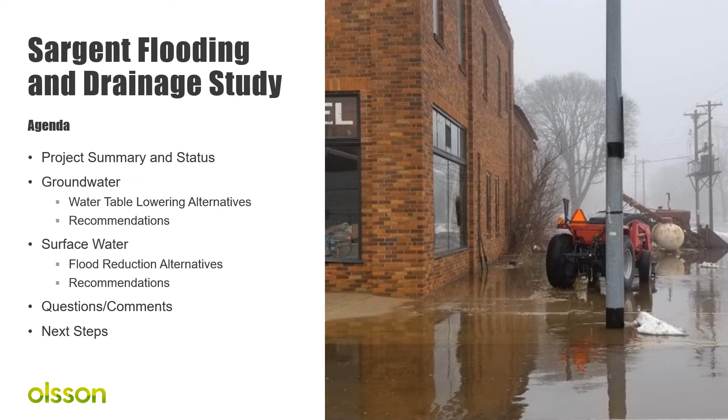At this point, the project has completed all of the hydrogeologic data and stormwater data evaluation. We've completed groundwater and surface water models to evaluate different alternatives and their effects on flooding and water table issues that, as I said, plague the city. We have had one public meeting, and we were glad to see the attendance at the meeting. We got a lot of information. Unfortunately, for this second public meeting, we're doing this online because of the COVID-19 directives across the state.

At this point, we've also provided in this presentation some conceptual project designs on some of the alternatives that we will be presenting in our final report. And so the final portion of this project is to prepare that report, and that will include the alternatives, the best alternatives for funding options for the different projects that we're proposing.

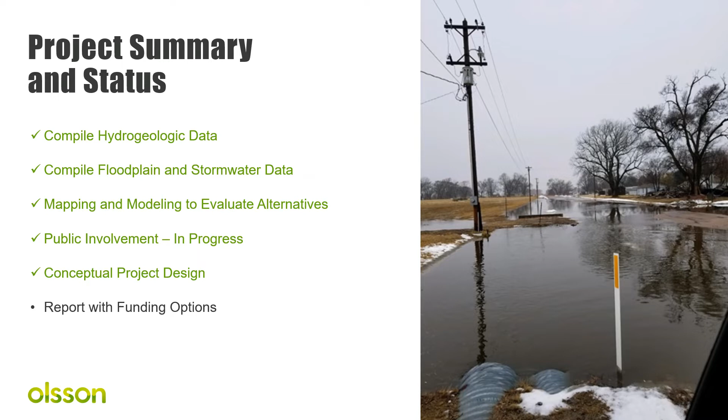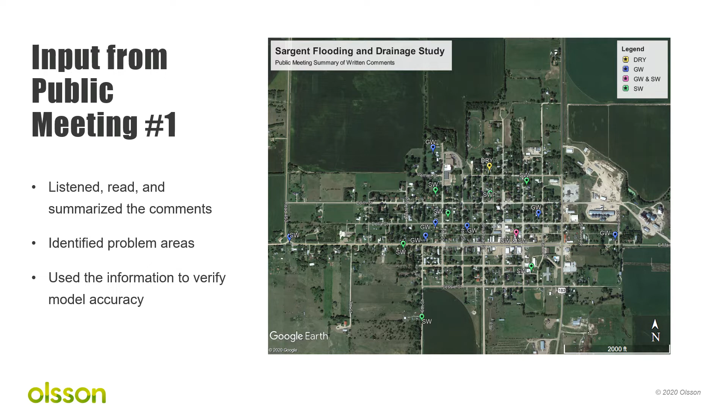Again, I just want to thank many of you for attending the public meeting we had. We took note and listened and read all of the comments that were submitted in writing, as well as many of the comments that we took down during the meeting itself. We identified the problems in the area in town. We also took note of that information and used it to verify the models that we developed for groundwater evaluations and surface water evaluations. So again, we really appreciate all the outreach that we've gotten from you all, providing that information. It really helped in detailing the information that we needed to do these analyses accurately.

So let's start with the groundwater evaluation. What we prepared for evaluating the ways to lower the water table elevation in town was a groundwater model that encompassed more than just the city. It did an area including the Middle Loup River and up into the uplands to the north. What we evaluated were two alternatives that we came up with to potentially lower the water table in town.

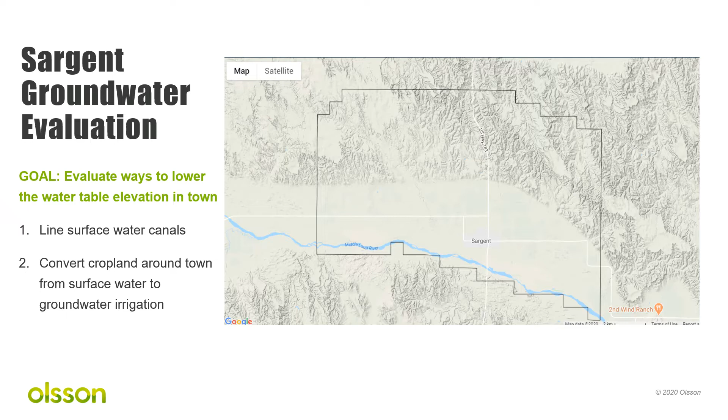One of them was to line the surface water canals that exist to the north, along the uplands here, right along the edge of town, as you know, on the north end of town. And then the other option was to convert cropland around town from surface water to groundwater irrigation. And I'll give you a little more detail on that right here.

The second evaluation that we did was to convert surface water irrigation north of town from surface water to groundwater by installing new groundwater wells. And to evaluate these two alternatives, we used a groundwater model we had developed.

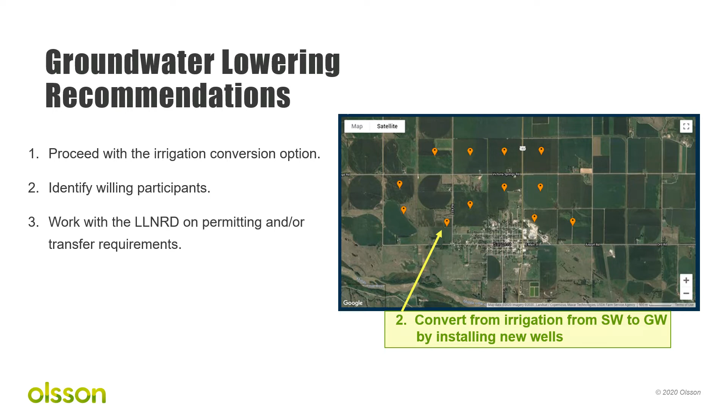Evaluation of the surface water drainage within the town of Sargent followed 3 basic steps. The first being identifying the drainages that contribute to flooding. We did that through feedback received at our first public meeting, data that we received through the NRD as well as the Sargent Irrigation District, and also topographic data from 2018 that allowed us to delineate the contributing drainage areas. And from that point, we could complete the hydrologic and hydraulic analysis that modeled flow in the community.

The second step was to evaluate alternatives to reduce flooding. And then the third step is recommend a specific set of alternatives based on several different criteria, which included the flood reduction area, the amount of land acquisition required, the total project cost, and ultimately the benefit cost ratio, which measures the benefits of the project against the project's cost.

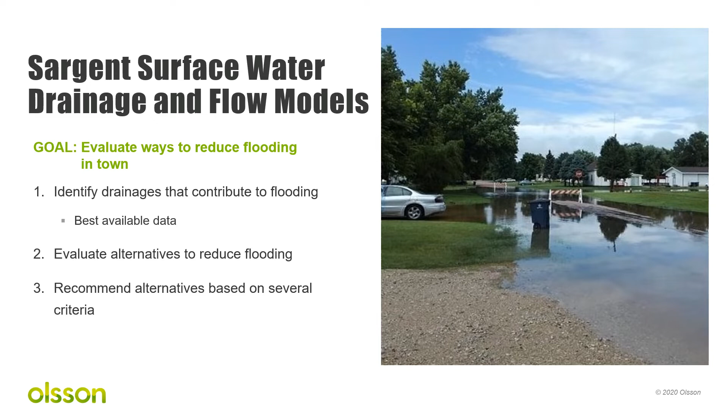We delineated a contributing drainage area at Sargent of about 5.1 square miles. The runoff from this drainage area enters the community via 3 main drainage paths. The first being on the east side of town, where water enters east of Highway 183 and flows through the Trotter facility. Right now it ends up at the pump location that is near Howard and Della Street. From there, it is pumped south and ultimately gravity drains further south, dead ending in an area near the river, but never truly making it all the way.

There's the central drainage path through town, where flow enters the community from the north as well, and flows south, ultimately in a drainage ditch parallel to Broadway Street until it rejoins the river. A third drainage path is at the west side of town along West Main Street, where a small localized drainage area combines with overflow from Sand Canyon and results in flooding issues for residents in that part of the community.

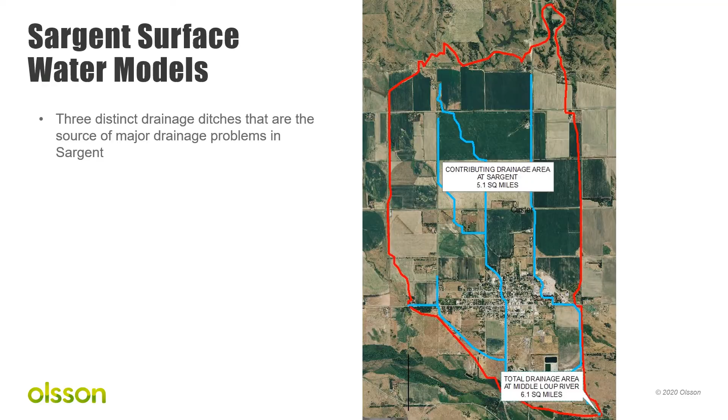Our existing conditions analysis also showed that the Main Street flooding seen on the west side of town is likely greatly influenced by Sand Canyon and the hydrology and hydraulics of that drainage way. The localized drainage that drains south to Main Street in that area does not result in enough runoff to match the conditions that were observed during the 2019 floods last year.

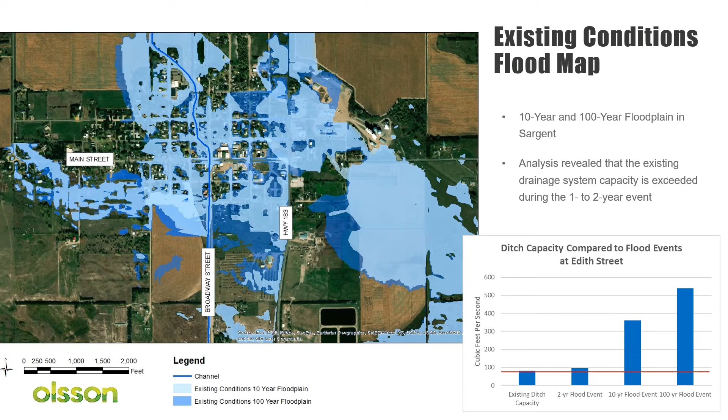We looked at a number of alternatives to analyze their impact on the flooding conditions within the community of Sargent. A few of them were eliminated for various reasons. We looked at excavating a larger channel through the center of town that would accommodate flows up to the 100-year event, but found that a channel that size would require the acquisition of a lot of private property and may require the movement or demolition of several structures. For this reason, that alternative was cast aside.

We also eliminated the replacement of the pump at Howard and Della Street. We found that although we tried looking at open ditch drainage or replacing the pump with culverts, flooding conditions were not improved due to a high tailwater condition at the culvert outlet and the fact that a defined drainage channel does not exist upstream of the proposed culverts.

We did find that moving the project forward will probably require 2 phases of construction. The first phase would be drainage improvements to the central drainage in the middle of town, increasing the capacity of the existing culverts by replacement or addition. This would provide protection from the small frequent events that the community has experienced over the last few years. Phase 2 would provide protection from the large events, and this would take the form of either detention north of town or a diversion channel. A combination of these alternatives is required in order to achieve the 100-year level of protection.

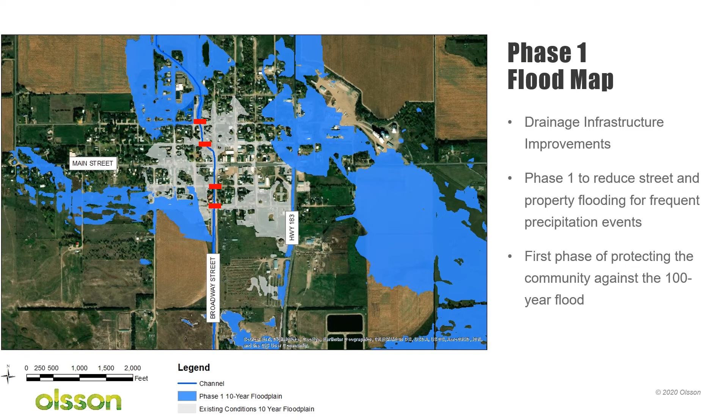The key thing to remember is that phase 1 would reduce street and property flooding for frequent precipitation events, the 2 to 10-year event. This is the first phase in protecting the community against the 100-year flood. This slide shows the preliminary cost estimate for the phase 1 drainage improvements in the community. You can see the total project cost at the very bottom of the table.

The benefits of phase 1 are that it would significantly reduce flooding for frequent events. There would be no land acquisition required, and it would eliminate frequent standing water and icing problems that had been noted frequently in the community. Drawbacks are that it does not protect against the 100-year event on its own, and it does not eliminate inundation in all areas.

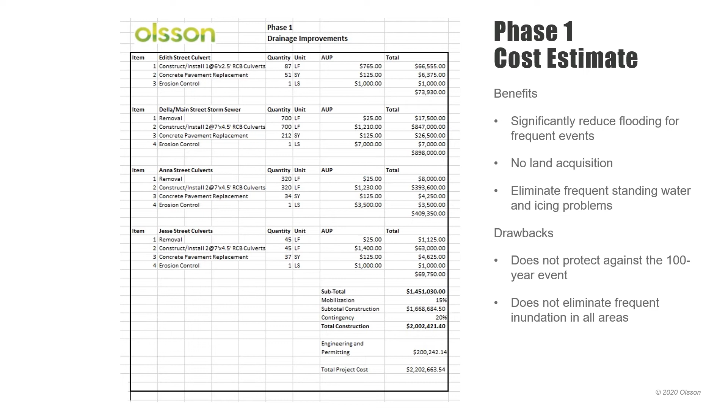Phase 2 of the drainage improvements would be a project that would protect the community from the 100-year flood event. In order to protect Sargent from the 100-year flood event, a second phase must be combined with phase 1, which was previously discussed. The first option for phase 2 is the addition of regional detention north of town. This would intercept flow before it reached the community and detain it for slow release over time.

The map shown on this slide is the 100-year floodplain map. The light gray is the existing conditions, with the darker blue being the proposed conditions. Please note that this is the 100-year floodplain, whereas on the last slide, we were discussing a more frequent event, the 10-year event.

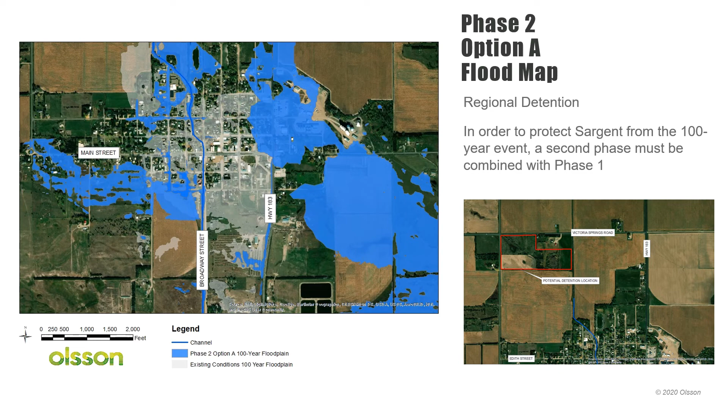This slide shows the preliminary cost estimate for option A of phase 2. The benefits of the project would be reduction of peak discharges associated with the 100-year event by 42% through the center of town. It would remove a large segment of the community from the 100-year floodplain. The drawbacks are the requirement of land acquisition for the detention, the risk of 100-year flood remains in parts of the community, and this must be combined with phase 1 in order to see the benefits shown on the map.

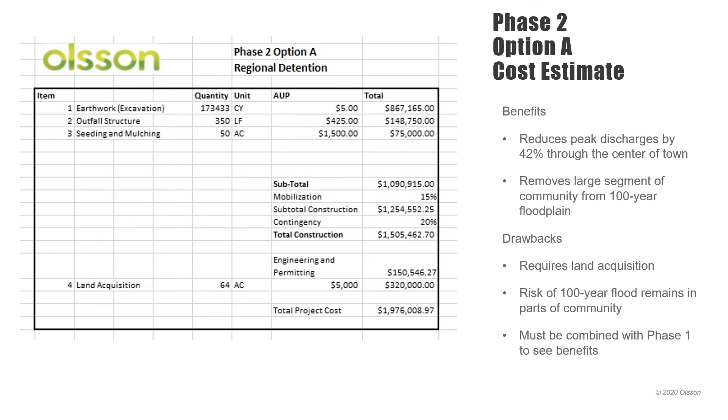Option B for the phase 2 drainage improvements consists of the construction of a diversion channel around town. This channel would intercept runoff before it entered the community and divert it to the east and to the south. The channel alignment is proposed in green on this map. It would have to pass under Highway 183 via a set of box culverts and again under East Main Street under another set of culverts. Further south, a canal siphon would be required before it could reach the Middle Loup River.

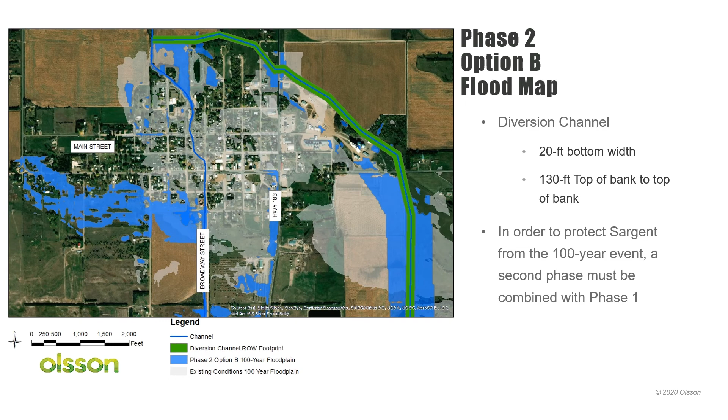Again, this map shows in light gray what the floodplain is under existing conditions for the 100-year event. The darker blue represents what the anticipated floodplain would be with a diversion channel in place. This slide summarizes the preliminary cost of the option B phase 2 diversion channel. The benefits of the channel would be that it removes the 100-year floodplain from the majority of the town. It would also minimize the need for the pump that is currently at Howard and Della Street by diverting water away from that part of town.

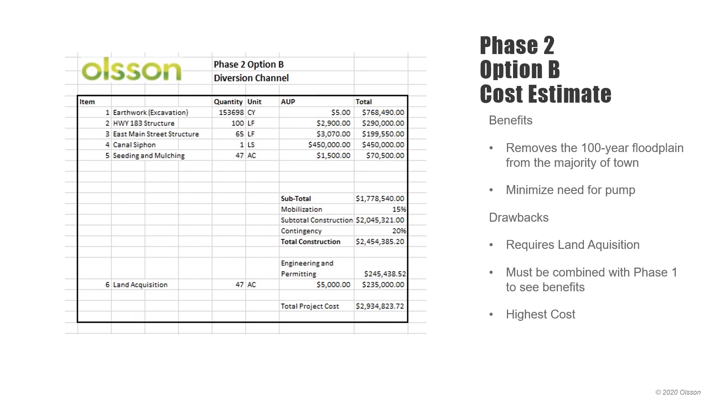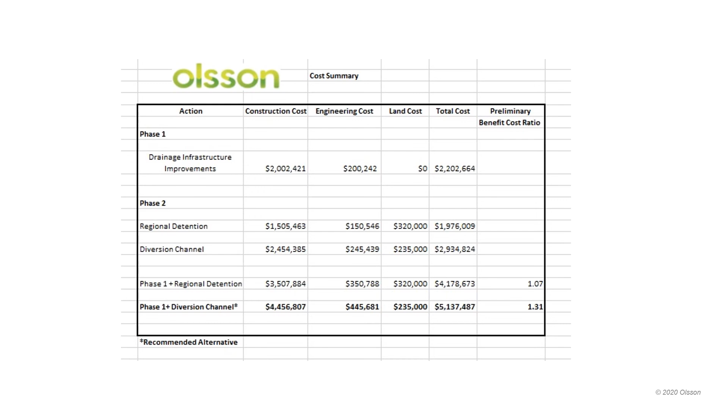In the far right column is a preliminary benefit cost ratio. A number above 1 indicates that the cost of the project is less than the benefits it provides. A number of 1.0 or greater is required in order for a project to qualify for most grant funds that are available. As a result of the benefit cost analysis as well as the improvements in the floodplain, we recommend that the community pursue the phase 1 drainage improvements along with a diversion channel in order to protect from the 100-year flood event.

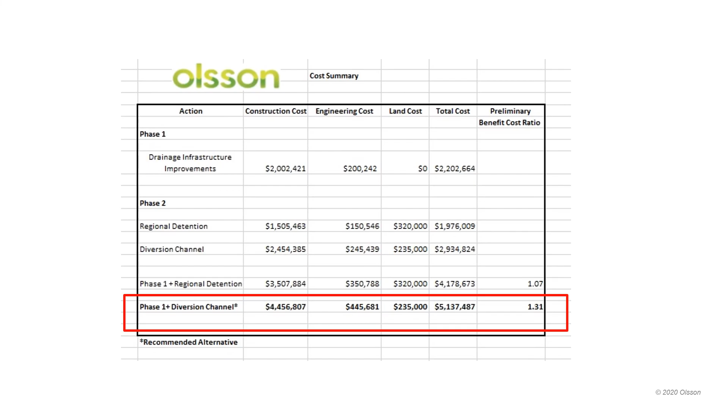As a result of our analysis, we recommend the community pursue a phased project approach, with phase 1 being improvements to the drainage structures along the center of town, and phase 2 being the construction of a diversion channel to intercept runoff and divert it to the east and south of the community. In addition to these projects, we recommend the community consider developing a stormwater master plan.

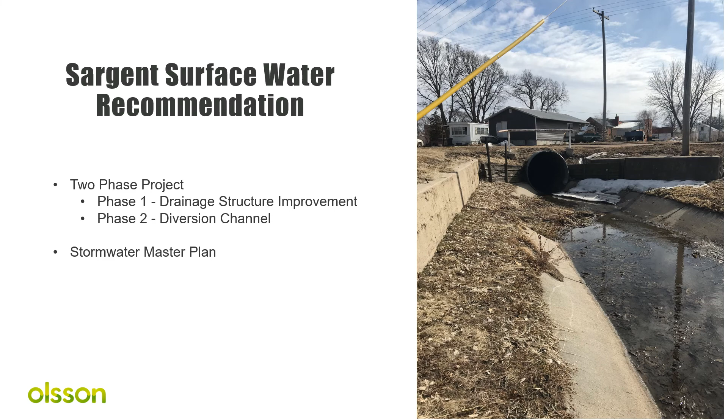A stormwater master plan is an opportunity to develop a detailed inventory of drainage structures throughout the community, outside of those main drainage paths that were discussed in this presentation. It is a way to record current drainage issues and help shape and prioritize smaller projects, which might include drainage culverts that have inadequate capacity, or even the issue with the Sand Canyon overflow and the need for a structure to convey that runoff south of Main Street.

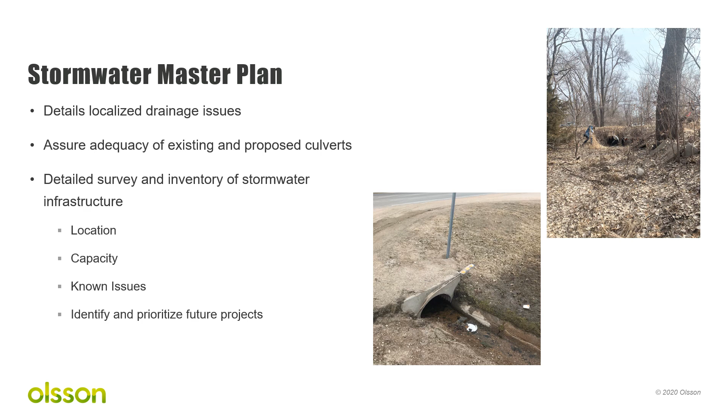Thank you, Carrie. All right, so that concludes our presentation on the flood and drainage study for the City of Sargent, and we want to thank you for listening and hope that you have seen that there are some alternatives that are viable for lowering the water table as well as reducing the flooding in town.